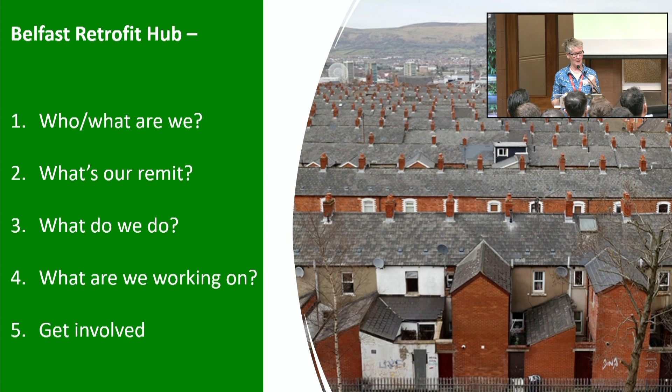Looking at who we are, I work for the council, and although we don't have housing stock, we've got considerable public sector stock, and we also represent the citizens of Belfast. So we have a real interest in making retrofit happen.

The hub itself, we set that up in September 2022, because we'd carried out a carbon analysis of Belfast and realised the built environment was such a major factor in all of this. So we convened the retrofit hub. We try to facilitate that, get everybody in the room, and my role is to nag, cajole, support, and try and get everybody to work together.

I suppose the most important thing is just to show the amount of collaboration. What we found is all the different sectors and organisations are all working on really interesting things, and if we can pull together what we know and what we found out, we can move ahead.

This is what pushed us towards focusing on the built environment, because the carbon footprint for Belfast showed us that domestic was coming in about 40%, and then commercial and public buildings were coming in about a quarter of the emissions in Belfast. In terms of homes, we're looking at about 156,000.

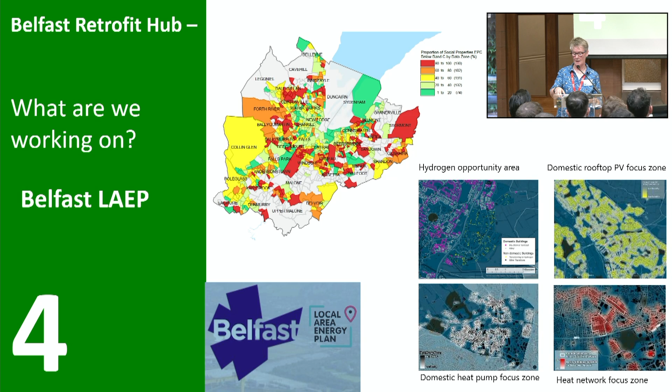Another one, you've got Alan Ritchie here today from C60 Architects. We'd identified that we were missing detail on this really tricky sector to retrofit.

So we commissioned them to carry out a detailed retrofit survey of two of the private sector's solid wall Victorian rental properties, because we need to understand what are the local challenges, what are the local prices, what are the local materials. The bottom line, and Alan can tell you a lot more about this, is that in some cases you look at buildings and no matter how much money you throw at them, you will really struggle to attain any kind of high level of EPC rating.

And the last bit, this is the bit that I'm knocking my pan in over at the minute - this is the really big piece we're working on. It's getting an area-based cross-tenure pilot project, because this is really common across Belfast. We have privately rented, social housing, owner-occupied sprinkled in amongst all the rest of it. So we are trying to find a way, because we know we've got major grant programmes likely to come in two years' time, but they won't solve everything. We've found that in GB and the Republic of Ireland.

We need to find a way, if you've got a street with maybe 20 houses in it, and some are social housing, some are eligible for the current funding pots - the ones that aren't eligible for funding, they're the ones that are blocking the whole thing from going through at the moment. So we're trying to find a way of bundling them. We're trying to sit down with our partners and work out there must be a solution to this, because even if and when those major funding pots come through, we're still going to have this problem to solve.

So we're also working with our partners. Housing Exec have got a very ambitious low carbon homes project, so they've got 400 deep retrofits going on, which are amazing - you might hear about those today. But also the Northern Ireland Federation of Housing Associations, they have an ambition to deliver a more shallow retrofit in 4,000 homes across Northern Ireland. Programmes like this can be the cornerstone to us being able to do a pilot project like this, and that's just a good example of how we collaborate.

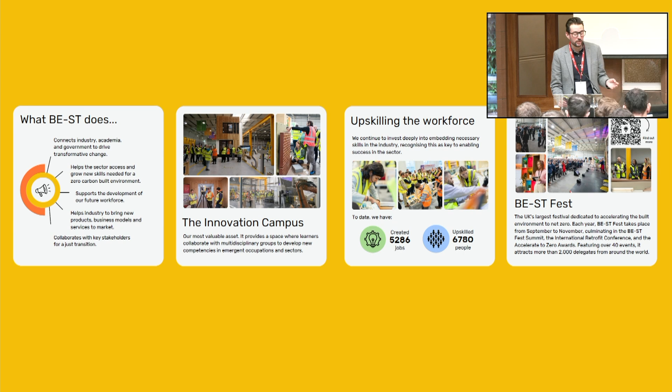We deal a lot with upskilling in terms of the workforce as well, so we train people in what would have been called green skills or clean heat skills. We do hands-on practical training. People get an opportunity to get hands-on, and we run a conference every year in November called BE-ST Fest, which is focused on 2 days - a general built environment net zero summit, followed by the International Retrofit Conference on the second day.

So we've heard about the domestic market, and we exist within BE-ST as an impact manager there working on retrofit. We do look at domestic properties when we talk about retrofit with a keen focus, but we're also acutely aware of the number of non-domestic buildings that are going to have to deal with very similar challenges on a completely different scale. But what we've found is that we see the similarities - questions around funding, knowledge gaps in the existing data sets, understanding what we want to do with building long-term asset management plans - all of that mirrors in non-domestic properties as it does within domestic properties.

So as part of the university, we applied to Scotland's Public Sector Heat Decarbonisation Fund, which was managed by Salix Finance on behalf of the Scottish Government, and we were awarded a grant of just under 1.25 million to retrofit our training lab or accelerator lab, where we do our physical training, to decarbonise the heat within that building.

As being the innovation centre, a core focus for ourselves wasn't just to demonstrate a living lab for retrofit, but also everything else that we did at BE-ST. So if we take a fairly difficult, complex concept like retrofit, and we make that more complicated further by trying to include modern methods of construction and off-site fabrication.

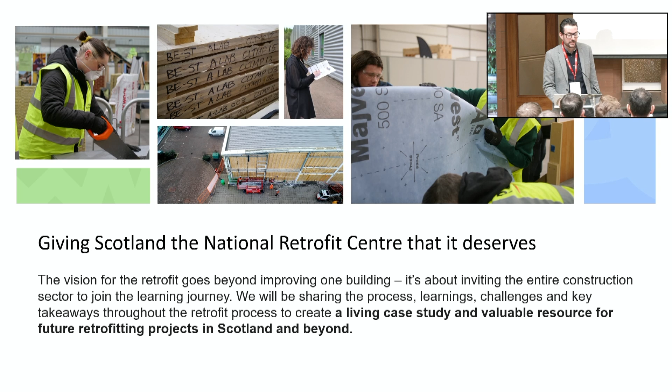In order to demonstrate that these principles in new build could be applied in retrofit settings, and to some degree or other help us accelerate the uptake of retrofit across the sector. What we want to do is have a demonstrator project that is a beacon that people can come to and learn from. It's potentially not going to be a replicable project, but what we wanted was to showcase as many products, services and approaches as we could that could be cherry-picked across the sector in terms of an approach.

Our key focuses are delivering the first phase of a multi-phase campus development. We saw this as being incredibly important because anyone who deals within asset management or estate management has to marry their long-term estate investment with retrofit. And how do you achieve incremental improvement without having abortive spend when you're doing works? So how do you ensure that you take it far enough to have a deliverable phase one project, but haven't taken it so far as to lock yourself out of future investment in the building?

Ultimately, we intend through this project to achieve the EnerPHit standard for the full building and the new net zero public sector building standard as well. We wanted to maximise our funding opportunity, because that's a lot of money to be able to bring in to the university, and it represented 80% of what we had applied for at the point of funding, which I'll maybe touch on later. And we wanted to be data-driven in everything that we did.

The core focus of the funding is around decarbonisation of heat, so that had to be kept true. But we promote a fabric-first approach, so we wanted to reduce overall demand. We also wanted to maximise other opportunities within our campus, using modern methods of construction and homegrown timber CLT manufacturing processes. From the outset, we decided to prioritise low-embodied, homegrown, natural-based materials as far as possible, and that gave us a benchmark to work from.

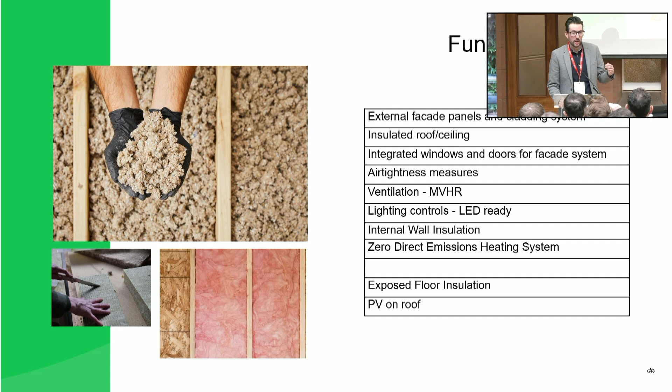So what we decided to do was move the exposed floor insulation to a second phase, and we've over-designed the walls and ceiling to account for the heat loss that generates, offsetting that to still achieve the energy reduction, whilst also having to design in an ability to move all of the doors on the external wall up by the 230mm we're going to have to work with.

So challenges and opportunities of a project of this magnitude—the biggest one being timescales. Government funding runs on a financial year basis. You're told on the 4th of April that you're successful in your funding application, and the funding has to be spent in its entirety before the 31st of March the following year. That included going from stage 1 design to stage 4, tender, procurement, on-site, off-site—not an easy task.

Again, trying to marry between scope—what do you include within a phase 1 retrofit, and what do you move to a future phase of development—and how do you ensure you're delivering across different project phases? How do you drive innovation within a project? How do you manage and mitigate risk? How do you ensure that the story is told?

So that's part of what I'm here to do today—to talk about this as what we refer to as warts and all, because we believe honesty is key. There's no point showing this at the end of the project with the chocolate box and saying it was very easy, a turnkey solution to deliver. And how do we create a platform at best for our partners to build from?

So this is how we've split it. Phase 1 is the current heat decarbonisation works. Phase 2 is further internal augmentation, extension, and final fabric envelope at the front end of the building. And overall, phase 3 is the future whole building being certified under the EnerPHit criteria.

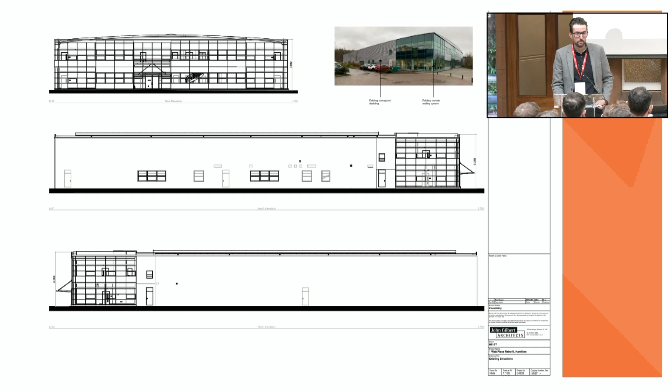This is a really boring slide, but that's really how boring the building looks, unfortunately. I don't have a better photo of it, but essentially what we're looking at top right is that curtain walling system, which is where the heated spaces are. That's coming down, and we're trying to turn this into an energy efficient box. Long term, this is what it should hopefully look like—these are the drawings submitted at planning status.

But this will not be the building that's delivered in phase 1, thanks to the value engineering. Things like your draught lobby and the canopy have moved into phase 2. Anything that sat outside the thermal envelope was moved into phase 2 to reduce costs.

The design itself is a panelised CLT system with JJI joists externally to give you the depth in order to install homegrown Scottish hemp natural-based insulation material. It will be a clad system in two different types of Thermowood from Russwood cladding, triple glazed windows, and the ceiling is a suspended timber ceiling detail, as opposed to a new roof, to get the thermal envelope there.

As part of the project, we looked at the existing building and measured its current performance as best we could. Within tight time constraints, it would have been nice to have a full heating season with which to install sensor technology, but we did what we could.

We did an air tightness test on the building and a smoke test, and stopped counting at 27 air rate changes and just decided to agree that it was pretty leaky. Anything that we would do would ultimately be to our betterment.

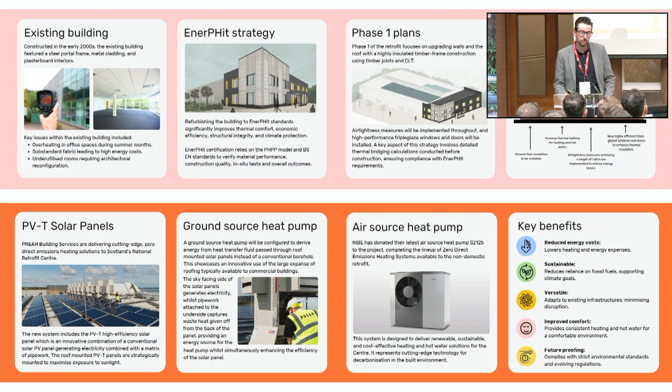In order to deliver this, we've used and utilised our extensive network and those companies that we want to support, but who also want to support us and help us deliver that. We're featuring Kenoteq K-Briq, a 90% recycled brick, a product that we have featured in our factory for a long time, and a company we've supported, but now they've only just achieved their BBA compliance, and this will be in a real build scenario as well that will build the plinth design.

We've got the Russwood Cladding System, a Scottish-based company, Ecological Building Systems, who support the sector in terms of training around passive house and air tightness products, Rockwool Insulation have supported the project, as well as Indie Nature, based in Jedburgh, who provide hemp natural-based insulation.

Ecosystems Technologies, who manufacture Scottish low-quality grade timber, homegrown CLT, into a commercially viable structural Scottish timber system. So if you're using CLT in the UK and it doesn't come out of our factory, it's not coming out of the UK stock.

So this is one of those opportunities where we're trying to see how do we scale this up and really make it deliverable, and how can we take it, not only demonstrate from a new build perspective, but within retrofit.

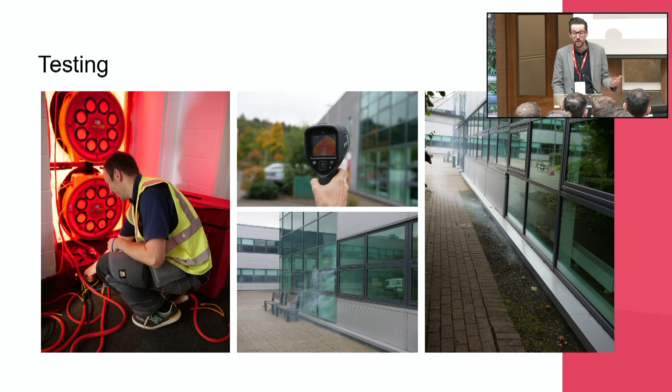We've retained all of that. We're very fortunate for space, so we've dismantled the facade system as carefully as we can, and we're looking at options for how we can reuse or move on these materials to be used in further, either a phase 2-3 construction on our site, or onto another site as well, to minimise wastage.

We have taken the opportunity to upskill. A big part of what BEST does is train people on how to build to passive house standard. This is the design team, as well as the main contractor and the main contractor's supply chain, undertaking that training together on site to understand the core principles of what we're trying to achieve in terms of the thermal envelope, continuous air tightness line, and tight fit of insulation. On site as well, the architects visited the factory floor to talk through the challenges of fitting the material and ensuring minimal gaps and no overlapping joints, in terms of toolbox talks and upskilling the supply chain to deliver other projects of this scale.

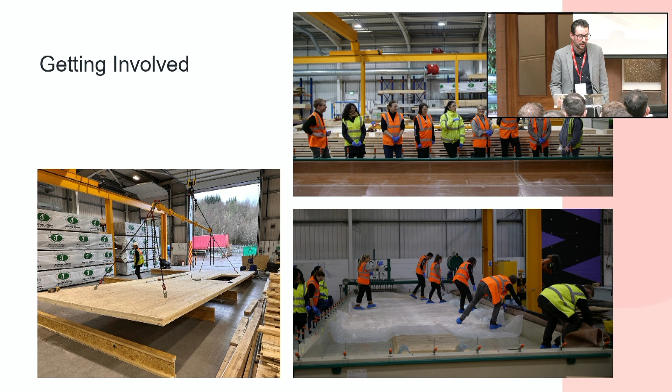As I said, we're very fortunate, and some of the panels we've been able to get hands-on and actually manufacture ourselves, and Ecosystems are very patient with us when we do that. We haven't been able to at this point, but we've just purchased a new CNC machine that's now large enough to process an entire panel. So these panels have been planed, filled and cut by hand. Next month, once our CNC goes on, the panel should be able, in theory, be lifted off the bed and run through, and all four edges cut and all the apertures removed.

So this is where we are just now. In terms of the demolition and dismantling, we're slightly further on, and we're ready with our first two stages of panels built, waiting for the wind to calm down so that we can lift them into position. I had hoped today to be able to show some videos of that, but last week didn't happen, so you're stuck with these rather boring photos and me talking over it.

But this is to give you a sense of scale of the panels. The panels range from 8 metres to 10 metres tall. The depth is defined by the amount of insulation that we required, and obviously we wanted a tight pack and a tight fit.

The more eagle-eyed among you will be able to see that some of these photos are not as it will be when the door is closed. We have had a lot of work to do in terms of the upskilling and understanding how to work with the material, the time it takes to cut it, the time it takes to fit it. And I don't think it's ever any fitter's dream job to have the client sitting up the stairs and be able to walk down at any time and point things out. But it does give us that higher degree of quality assurance.

Yeah, and that's us. Thank you very much.

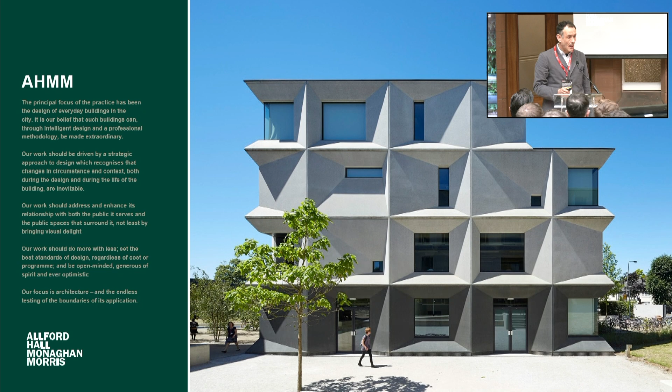AHMM, so Allford Hall, Monaghan Morris, we're a general architectural practice. We work across all sectors, all building types. We're London-based, but we have offices in Bristol, Oklahoma, Madrid, and a small office in Sydney now. We work across all sectors, as I say, new build and retrofit.

My role within AHMM is we have an in-house building performance team. We work as a kind of in-house consultancy, interrogating architectural decisions, carrying out analysis across all kinds of environmental metrics to try and understand and improve the impact of the decisions we're making as architects.

So what I'm going to talk about today is a tool we developed through a KTP program with UCL, which visualizes whole-life carbon, and we use to interrogate decisions and understand the kind of life cycle impacts of those decisions.

But I want to start with just highlighting retrofit. I've been at AHMM for 11 years, but as a practice, we have thought about reuse and what we now term retrofit of buildings as a pragmatic starting point for any building. This is the Tea building on Shoreditch High Street in East London. You can see the series of dates on there. We first worked on this in 2003. The competition for this building was to demolish it and propose a new build on that site. We recognised the kind of qualities that are in the space. It's the tea building because it's the old Lipton tea warehouse, beautiful high ceilings, great bones, good daylight. So we recognised the value in that building and proposed keeping it.

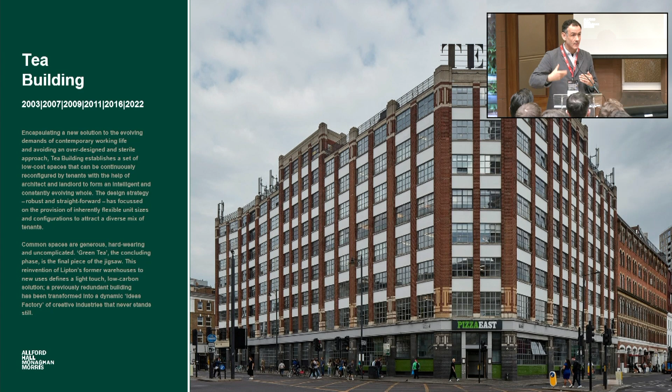The series of dates on that show that we've been back to carry out further retrofits. The 2009 project was called Green Tea, which we went and retrofitted and upgraded the fabric, replaced the windows. In 2011, we went back and upgraded the environmental systems in there. But it's recognising the historic pattern of those buildings and the architectural qualities there, which is why we were thinking about retrofits.

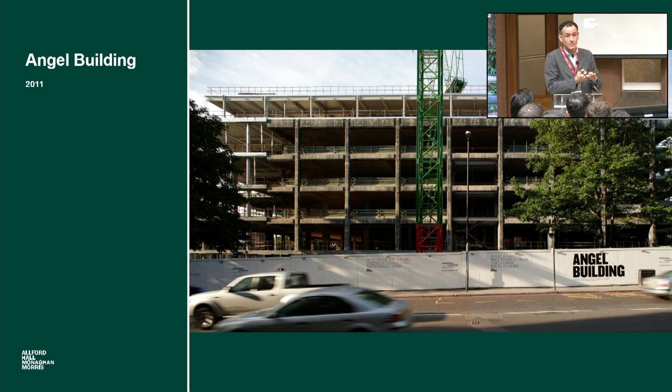The Angel building in 2011, again, is another retrofit. It's a quite slick office building, city fringe near Angel in London. But again, this was an existing building. It was an unloved telephone exchange. We recognised early on in that process that the existing frame had good floor-to-ceiling height, good bones again. We could retrofit that. Carbon wasn't on the agenda at the time, so it was about cost and time. We saved the client £7 million in 9 months on programme by reusing that frame. So it was an intuitive way of thinking about that building.

We turned the unloved courtyard into this new public room on the right-hand side with what was at the time the greenest concrete. We did a report, 35% PFA in 2009 was quite progressive, we thought.

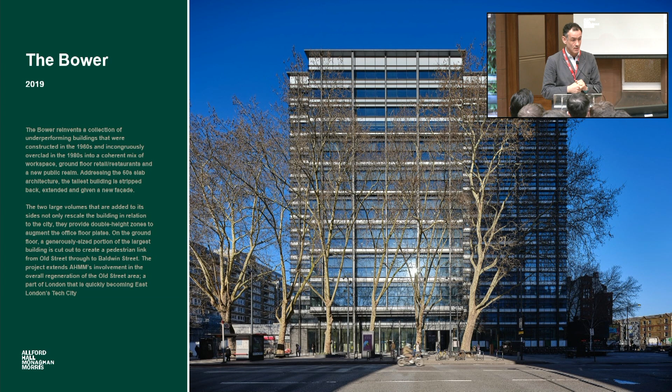Moving to more recent buildings, this is 2019, the Bower, on Old Street just along from our office. This is a 1960s tower which was reclad in the 1980s, and then we have similarly reclad it in the 2010s. It is a retrofit. You can see we added 3 floors onto the top of the building. We added some wings onto either side of the building. The existing concrete frame, again, good bones, but had pretty limited floor-to-ceiling height.

Final one is one we finished last year, Tower Hamlets Town Hall. This is a listed building, so in this case we're working closely with heritage bodies so that they can understand what we're trying to achieve. We can work within their parameters and constraints, and we can upgrade fabric sensitively to the building.

But what we also like to investigate from an architectural point of view is taking these historic buildings, in this case a listed historic building, and putting these kind of modern interventions next to there, so we create these moments of contrast and we think of architectural delight around that. So a kind of history of AHMM's approach to retrofit as an intuitive, pragmatic approach to how we think about architecture and recognise the qualities that are in those spaces.

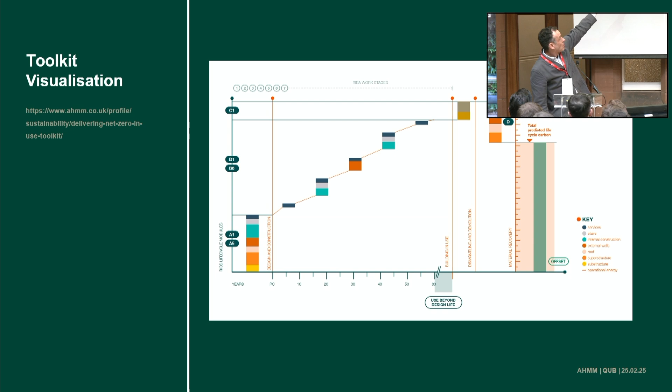The C module at the top is the dismantling and demolition of the building, the carbon associated with that. And then where we go beyond RICS into the D, along here is a negative number, which is the carbon you can save by recovering materials from this building. So in this chart, you get a whole life carbon number, which then defines what you need to offset. And what we're trying to do with this is to provoke the lowest possible life cycle carbon and get designers thinking about what happens during the life of the building and at the notional end of a building. So setting up for retrofit, essentially, so we have to offset minimally.

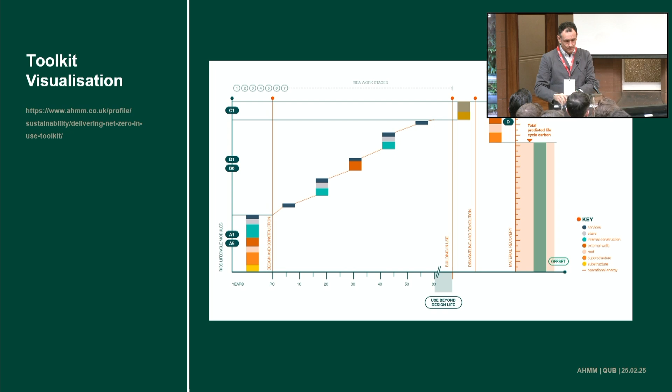So I'm going to use that chart to talk about a couple of other projects as we go. The toolkit interface, as I say, is an Excel spreadsheet. Our graphic designer has done stuff with Excel that I didn't know was possible, and it's beautiful. There's buttons, it kind of opens up and unfolds in front of you. You can download it, it's freely available, and there are some tutorial videos on our website, so you can download this, use it, and start using it. It works on quantities and carbon factors for materials.

So I wanted to talk about two projects and then a bit of research. Excuse me.

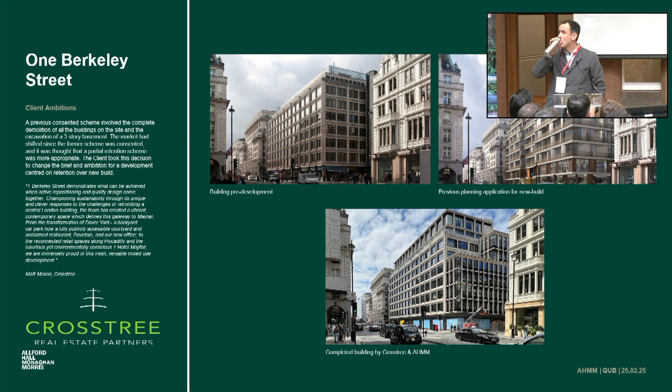First project is 1 Berkeley Street. This is West London, on Piccadilly. The building on the left, just poking into the corner, is the Ritz Hotel. So this is a historical space in a heritage context.

Our client came to us around 2020 with a different business plan, who thought they could reuse the existing building. The bottom image is what we have done to that building. We've extended it upwards and outwards and retained the existing building to create an office and hotel.

The fact that this is in Piccadilly is important because it is retrofit in a high-value location. So we're talking about retrofit in a space where you might expect things to be new and shiny, whereas actually the market is accepting reused and recycled buildings.

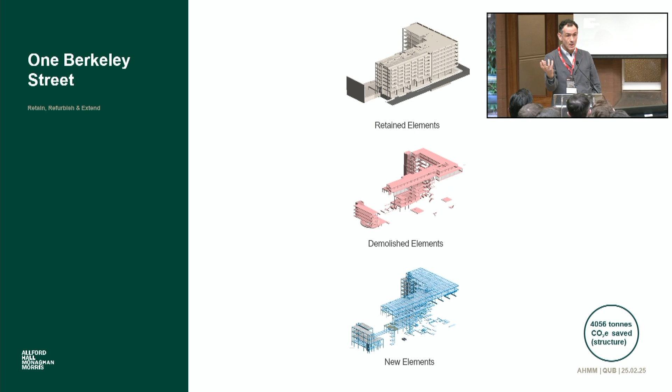So this is just some call-outs from our Revit model. We've got some retained elements. We did demolish quite a lot, and we did build quite a lot, but we reckon we saved about 4,000 tonnes of carbon just by keeping the frame there, keeping the superstructure, and not digging any holes in the ground.

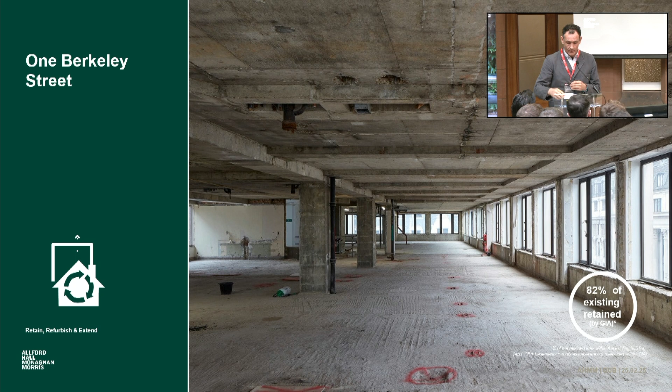So the building itself has got good bones again, so it's a concrete frame, it's got good floor-to-ceiling height. We've saved about 82% of the building by GIA. As I say, we've replaced the windows, we've upgraded the thermal performance of the fabric. On Berkeley Street itself, the facade is simply painted, the bricks are simply painted.

We introduced these strips of greenery up the facade to create some biodiversity net gain, and our client had an aspiration to have some kind of explicit environmental qualities around this building. The courtyard, again, is kind of lushly greened.

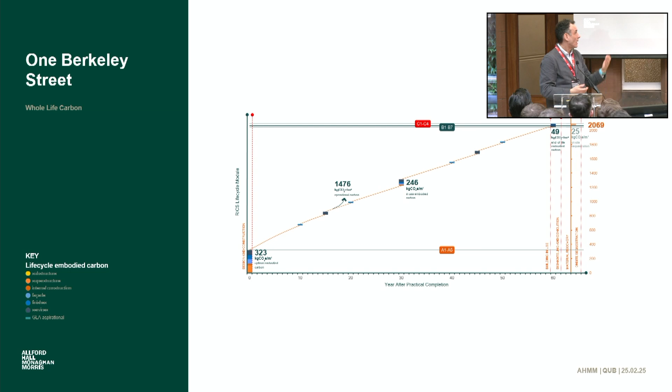So an obvious way to decarbonise the life of this building would be to electrify the building. The refurbishment and replacement rate chunks in this are RICS assumptions, because in this case we couldn't predict the future - we don't know what our client is going to do with this. I've got some slides later to talk about the limitations of that.

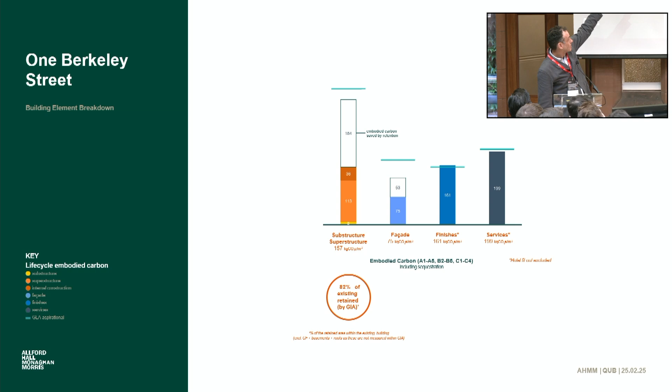So you can see that upfront carbon is saved in the substructure, superstructure and the facade because we kept most of it. The stuff that we are not doing better than targets on is finishes and services, because that's all in the life of the building. So we need to think better about how we work the life of the building.

A note on circular economy: we used a load of reused raised access floor. I'm highlighting this because it was a total nightmare. Every time I went to site, I got shouted at and sworn at by the project manager because he's finding this stuff at the right time, in the right quantum, getting onto this site. Total nightmare. So I think circular economy is something we need to work on as an industry.

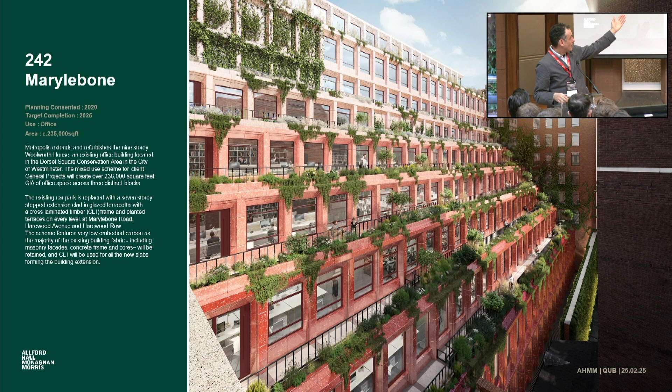Second project, 242 Marylebone. This is a slightly different project - another reuse, but with a significant portion of extension. We built a load of terraces with some greenery on it, with outdoor space and amenity. It is again in City of Westminster.

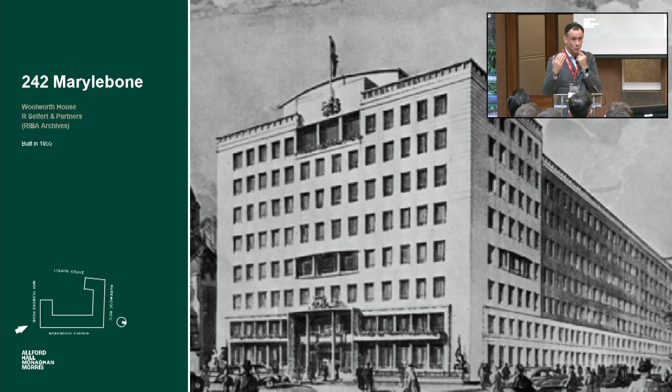In fact, our client had a quite multifaceted brief for us about the user experience and work-life balance, in terms of amenity, how they integrate active travel, running, etc. into the building. So they were interested in the user experience and the architectural experience of this building.

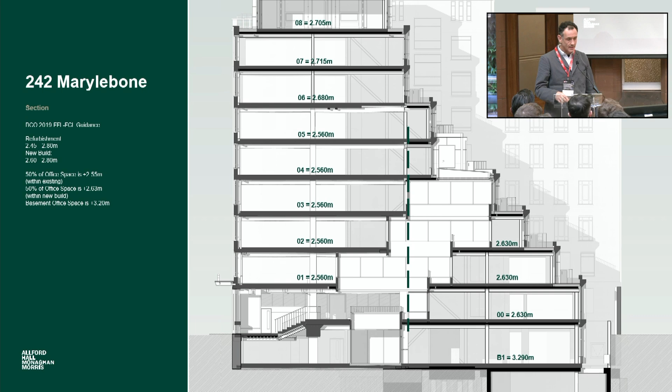Again, our load-bearing brick building with lots of little cellular spaces in the middle—we took out a lot of that space and replaced it with columns. We saved, I think, 95% of the existing GIA.

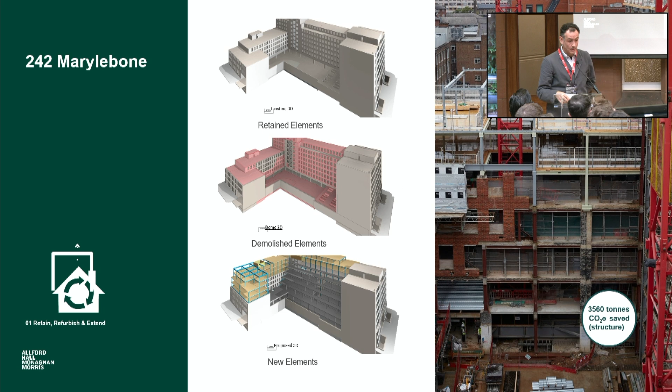Again, we had to strip out quite a lot of the building, particularly on that back elevation. We had to take the facade off so we could rebuild that extension. We think we saved about 3,500 tonnes of carbon by keeping the structure. We wanted to keep the bricks.

More on that later, but the structure looks like this. So we've got the existing building in grey, we've got a new steel and CLT structure on the side and on the top.

Driven by the carbon, a steel and CLT superstructure was not that much lower than a steel and metal deck and concrete structure, but where the savings were was in the substructure, because the steel and CLT was a bit lighter, so we saved a lot in substructure. But we have dug a new basement in this case, so we're kind of adding to our carbon footprint in doing that.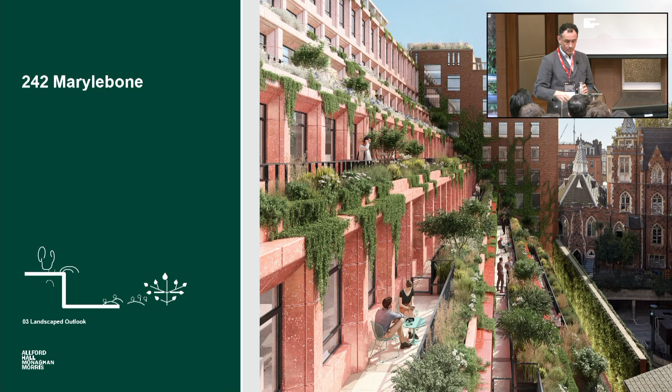The terrace looks like this. Every floor plate gets an external space, with soon-to-be lush green terracing around there, which delivers our biodiversity net gain, but also gives people access to some biophilia and hopefully some place of respite, as per our client's aspiration.

And we also upgrade the entranceways. The green element within this terrazzo was a crushed part of the existing structure that we thought we could build into that and have some visible nods to the reuse of the building.

We cut an atrium through the building to get some daylight into those newly created deep plan floor plates, but also to give you a view out and some drama to the entranceway, because the existing entranceway didn't have any of that. And then the new floor plates—as I said, we were looking to have clean, high floor-to-ceilings as much as we could within the constraints of the existing building, and marrying through to the existing floor plates.

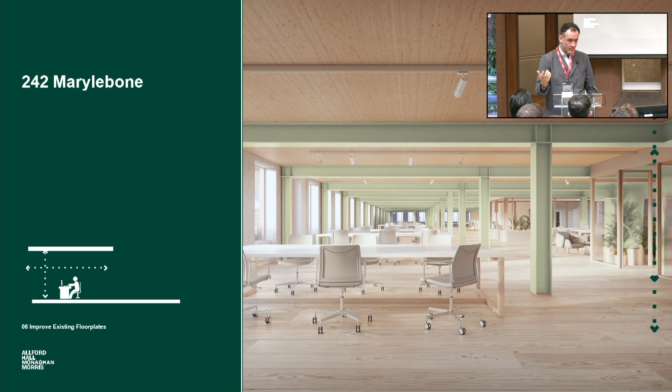Our client was interested in the architectural experience of being in these spaces. So what the CLT and steel gives us is a really clean soffit—all the air is delivered through the floor. We have minimal servicing on top of that, so there's less stuff to rip out throughout the life of the building, and we get this nice clean floor plate.

Numbers. So same charts as the previous project. On the left-hand side, we've got upfront carbon, A1 to A5, again compared to the GLA target and aspirational target in the UK net zero building standard.

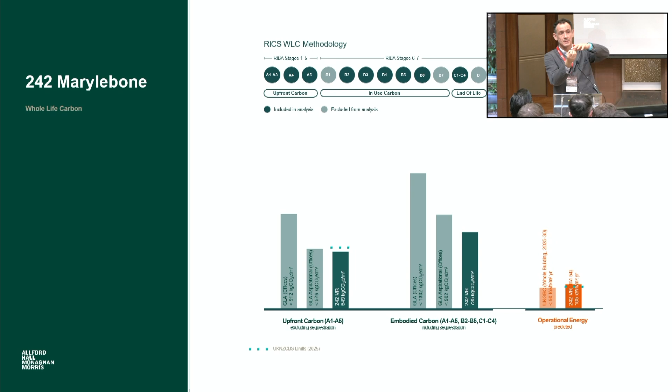So you can see we are about at the GLA aspirational target in this case, and that's because we've dug a basement, we've built a new structure, we've built a new building alongside the existing one. But because we've kept so much of the existing building, the carbon intensity of that is diluted across the GIA of the whole building, and it gets us just underneath the net zero carbon building standard.

Similarly, for whole life carbon, we duck just under the GLA's aspirational number, at 735—sorry, the resolution's bad, my eyes are even worse—so yeah, 735 kilograms CO2 per metre squared.

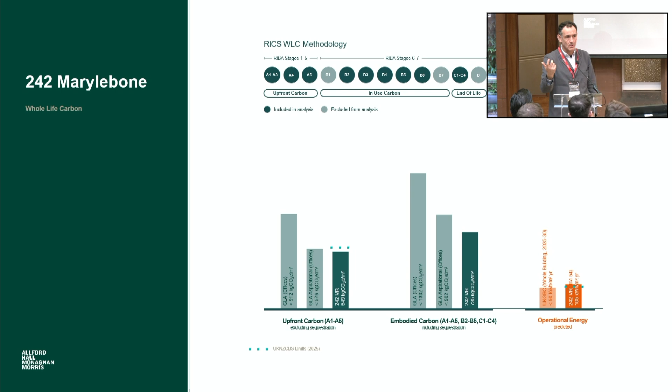And then operational energy, we're around about net zero carbon building standard as modelled. So we need to go into this building—it's due to complete next month—so we will get into the building, do some post-occupancy evaluation, see how much energy is actually used. But as modelled through a TM54 process, we think we're around about the right place.

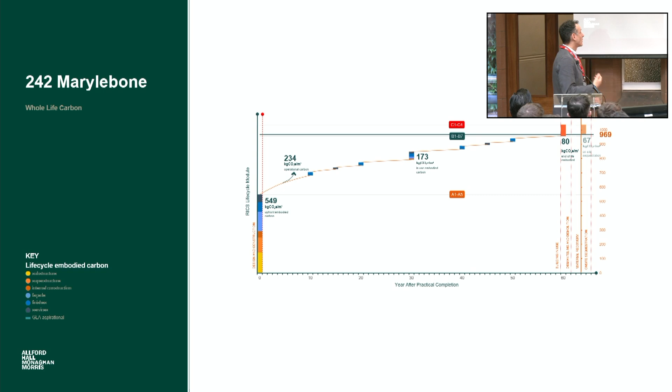Our life cycle carbon chart in this case looks like this. You will note we have got a much bigger lump of upfront carbon with a load of yellow this time, because we've got a basement dug, we've got some substructure in there, we've got superstructure, and we've got a load of facade this time because we've had to rebuild that facade. We've created a load of new facade in that terraced building.

Operational energy—it's an all-electric building, so it is relatively flat. There is a slight curve in that because our model takes into account the planned decarbonisation of the grid, so that is why there's a curve there. And then again, the reuse elements are as per the RICS methodology, so we're making assumptions based on how this building is going to be retrofitted and reused over its life to inform how we decide, but we don't actually know that.

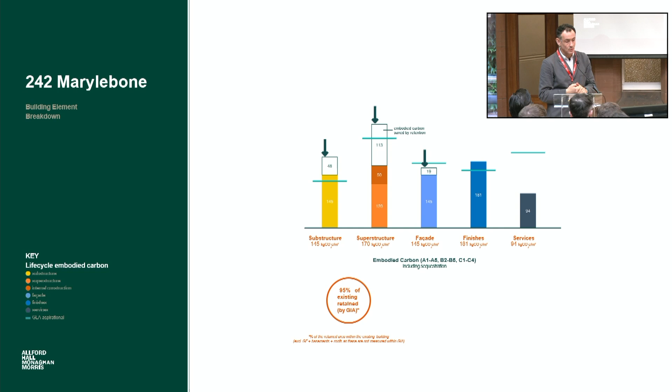Other numbers: substructure on the left, superstructure in the middle. Again, the coloured pieces are what we've spent in terms of carbon, and the white bits are what we think we've saved by keeping the existing building. So we think we've saved a lot in the substructure and superstructure, a bit in the facade, but for finishes and services over the life of the building we're not sure, and we don't know what we've saved, if anything.

A load-bearing brick building, we were taking a load of bricks out of this building, we were creating a load of new facades. We wanted to reuse the existing bricks, divert them from landfill on site, reuse them.

The raised access flooring in the previous project highlighted the difficulties with supply chain and timings. This project highlights the difficulties of insurance policies. We couldn't get anybody to insure reused bricks on site, so we've had to give them away to somewhere else. They're sitting in some reclamation yard for somebody's house extension rather than being able to use them on site. And we had to go and buy some new bricks to match the ones that we had on site and were throwing away. So something for us to work on is how we ensure reclaimed materials can be used.

The final thing I wanted to talk about was a piece of speculative research we did called Fit Out, Rip Out. This is about fit-outs in commercial offices. It's relevant to retrofit because it's about how we set up our buildings for retrofit.

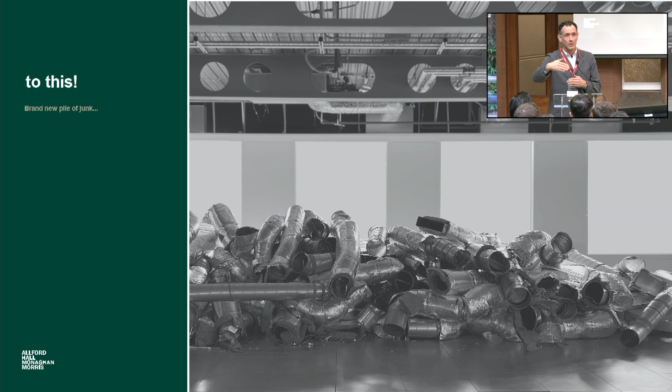So what we wanted to do was understand what is happening in the use of our buildings, commercial offices in this case. How often is this sort of thing happening? Is that reflected in the RICS methodology, and what were the carbon implications of this, and therefore how can we use our visualization to help drive architectural solutions to minimize life cycle carbon?

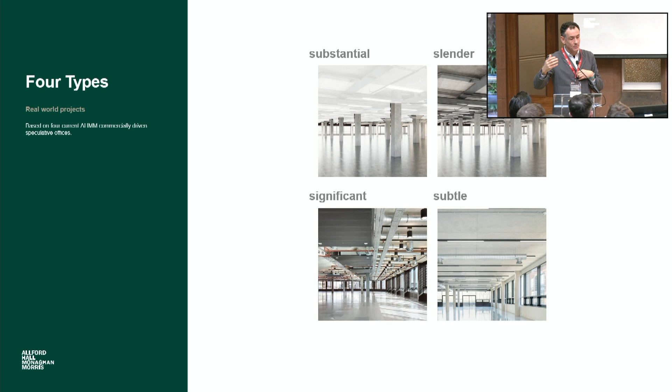Slender, which is lighting and air delivery above, and then the subtle, which is our office in Bristol actually, which is cooling embedded in the slab, air delivered from above, minimal finishes, minimal fit-out, less stuff to chuck away. We codified these things to understand what elements of those Cat A fit-outs are baked into the building.

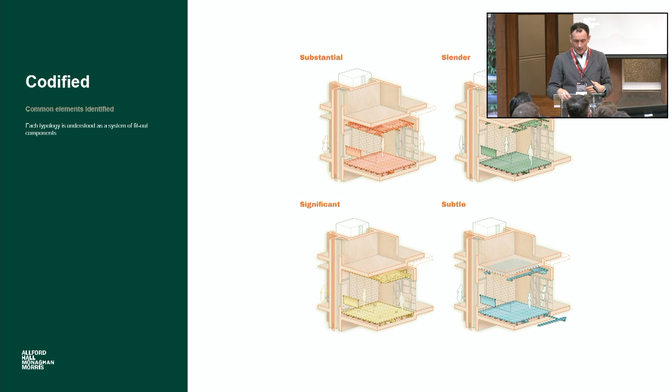So, for example, in the subtle version, the cooling coils are in the structure of the slab. You can't take them out. They're baked into the building. Whereas in the substantial version, it's all hanging from the ceiling - you can rip it all out and chuck it away if you wish. And that's what we see happening time and time again in our projects.

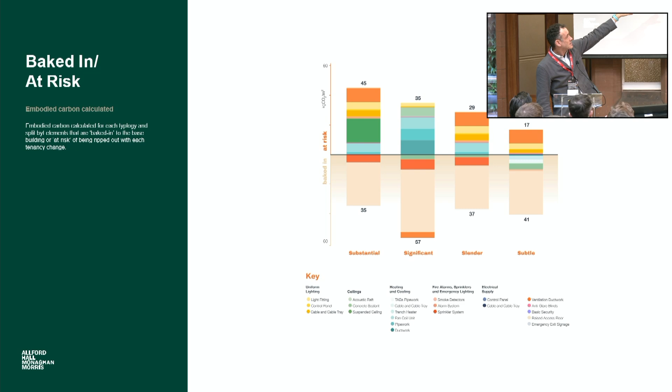We then accounted for the carbon in each of those Cat A fit-out versions and classified it by what's at risk. Above the line is what's at risk, i.e. what can be ripped out of the building, and below the line is what is baked in. So in the substantial version, of the 80 kilograms of CO2 per metre squared just in fit-out, we reckon about 45 kilograms per metre squared is at risk of being ripped out every tenancy turnover. Whereas in the subtle version, of the 58 kilograms per metre squared that exists, we think only 17 are at risk of being ripped out every tenancy cycle.

We then used our life cycle carbon tool to analyse what actually happens in typical commercial offices in London - a particular segment of London, a particular size of offices - which said that the average tenancy is 5.1 years, and on average, every third one of those tenancies is rolled over.

If we look at the subtle version of that, which is when we bake in as much as we can into that fit out, we can see that the same tenancy rhythms, the same patterns of use end up with much less being ripped out at the changeover of a fit-out cycle, so much less carbon over the life cycle of the building, but still nearly double what RICS is assuming.

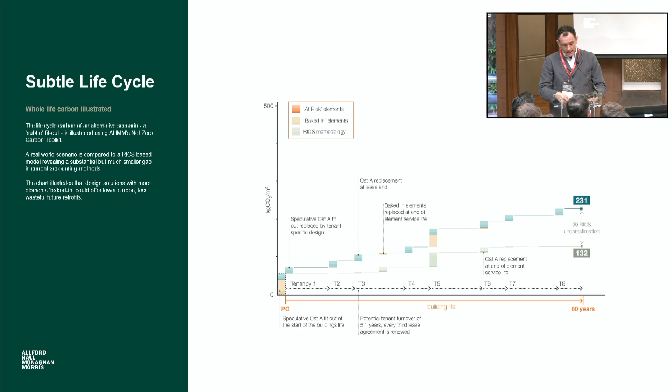So what we're trying to do as designers up front in new builds and in how we retrofit buildings is facilitate future retrofit in a low carbon, low resource way.

So what's next? I think we can challenge the market perception around retrofit of buildings. I've shown you a building in a kind of high-value bit of London, which maybe wouldn't traditionally go for a recycled building, so I think the market is shifting.

I think we've got a lot of work to do in circular economy, so in supply chain and timing and storage of stuff and accessing things and how we ensure materials for reuse, we need to get on top of. I've talked about carbon and decision making and how we're using this carbon visualization to inform and articulate decisions, but of course it's not the only thing.

Lots of other aspects are coming into our decision making about architectural quality and the kind of character of those spaces. So carbon is one parameter of many.

I'm sorry, I can't read this. I forgot what it says.

I suppose the other caveat is retrofit is not always possible. I think we need to keep that on the table. The retrofit is not always a possible option. We have some sites where we are knocking down buildings, and it's because the existing building is not of good enough quality to keep. So retrofit, while it is the aspiration, it's not always absolutely possible.

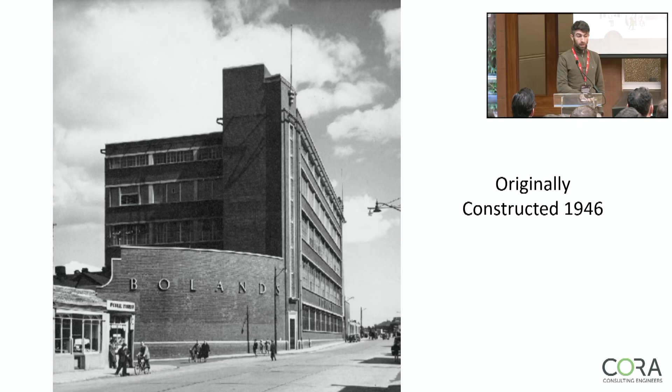Okay, so the Google Treasury Building was initially built in the 1940s, and it was called Boland's Bakery. It was initially a bread factory. We were lucky, we got to see a few photos of how it was constructed. Really useful when we're looking back and trying to renovate the building as to how it was built, what materials were used and how they were used.

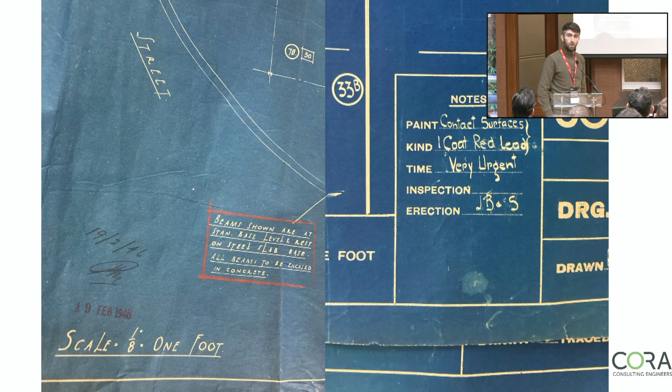On top of that, we also received, we were really lucky to obtain these - the working blueprints for the construction drawings here. Didn't realise until recently, but it was actually a Belfast architect that was involved in the 1940s, based down near Castlecourt there. Things were done really differently back then. You'll see on the left-hand side, that is the signature from the contractor confirming receipt of the drawings. Not something that's done today, but on the right-hand side, yeah, some things never change - looking at the time, being very urgent.

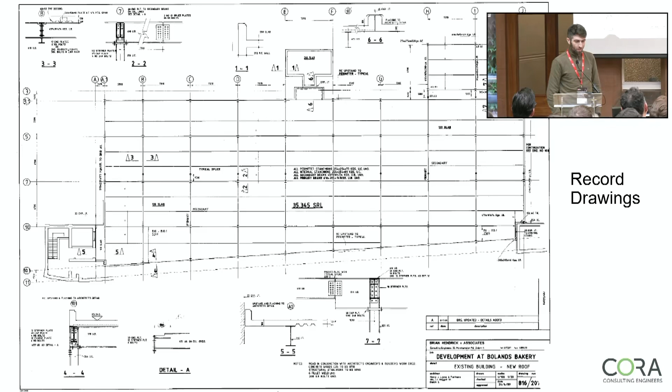Building remained unchanged then for another nearly 40 years, up until our project began in 2022. Received a bit of media attention back a few years ago for being the home of NAMA - probably unwanted media attention, but media attention nonetheless. AHMM are a familiar face today, with Craig speaking earlier - thanks to Craig for not stealing our thunder with this building earlier on. But yeah, proposed project was a 2-storey vertical extension and horizontal extension as well, getting rid of that atrium out the front. You're going to see a bit of crossover between some of the AHMM principles that they've used previously - raised access floor tiles, brick reuse, stuff like that.

Okay, history of the project done. So in now to more embodied carbon design. Just worth noting throughout this, we've been talking about embodied carbon for a long time now. But this presentation is nearly all photos, similar to Craig and Gavin earlier. We know what we have to do, we know what we can do, but this presentation shows what we're currently doing and what we have done. So this project currently on site, due to finish over the next few months, I think, hopefully by June.

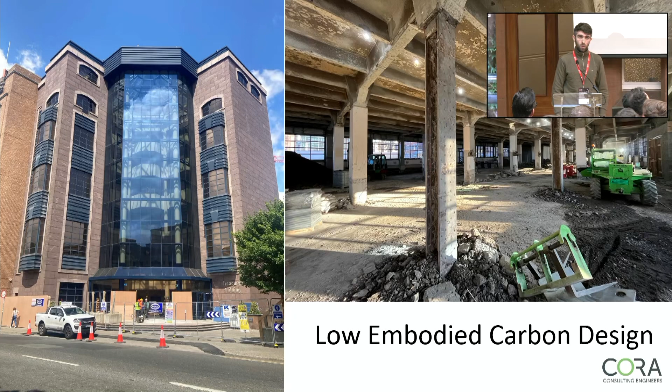Before that, just emphasising why we're even bothering to do this. Overall, a building's footprint is roughly about 50% cradle to gate, so on materials that go into the building of that structure. If we can improve our building methods and material use, it's not a drop in the ocean. We'll make significant improvements in the overall embodied carbon, the overall carbon footprint of the building.

Before getting into the design or what materials we're going to use, we wanted to interrogate the brief with the client and the architect. If you're designing a building, especially in Dublin or London, you design for 4+1 allowable live loading. You don't question it, that's just what's done, it's what everybody does. This is well in excess of the Eurocode, where in the south it's 3, I think here it's 2.5 plus 1. All we were asking was, please reduce the allowable live loading on the building. We're not asking for anything in excess of Eurocode, just let us design to Eurocode really.

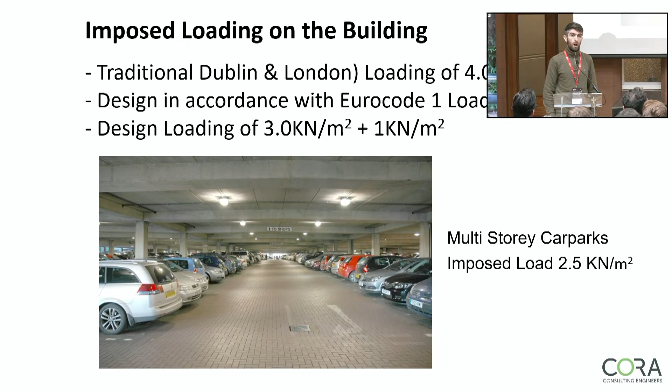We took the opportunity here, the client is Google. There's a high likelihood this won't be the last building they build in Dublin. We're hoping they'll carry this on throughout future projects. So it might be a small difference here, but if this maps out across any future buildings they do, it'll be a big improvement. Also, there's reluctancy out there to be the first client to do this, hesitancy like, will our tenants accept a building that's not 4+1? Our hope is that they'll look and go, if it's good enough for Google, it'll probably be good enough for us too. One of the big selling points we used to convince Google of this was, down below is a multi-storey car park designed for 2.5 plus 1. I think your office is going to be okay.

Onto some material reuse. Quite early into the project, I think this was being set up, so taking the opportunity here to let you all know about this platform. The Irish Green Building Council have a platform out there called CMEX. For all intents and purposes, it's a virtual or online salvage yard. If you have large or any quantities of construction material that you can't use in your own building, please put it onto this platform. It's all free, in the hope that somebody else might want it and take it off your hands, once again stopping stuff from going to landfill.

On this project, there was 500 metres squared of granite on the facade of that 1980s extension. Rumour has it, handpicked by Johnny Ronan himself in Italy, brought back. This is 40 mil thick granite. We took the opportunity here to put this on the CMEX platform. This was all carefully taken down and stored across 55 pallets, 500 metres squared, so a significant amount. Just over the last few weeks, we received word that 100% of this has been reused across a lot of projects around the country, in small and big quantities. You don't have to take the whole thing, just take some of it. So 100% of that didn't go to landfill.

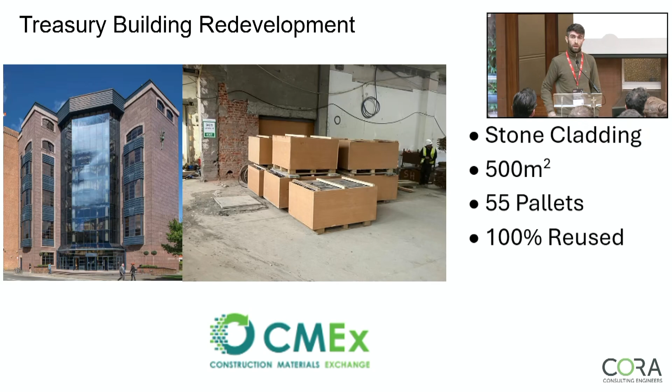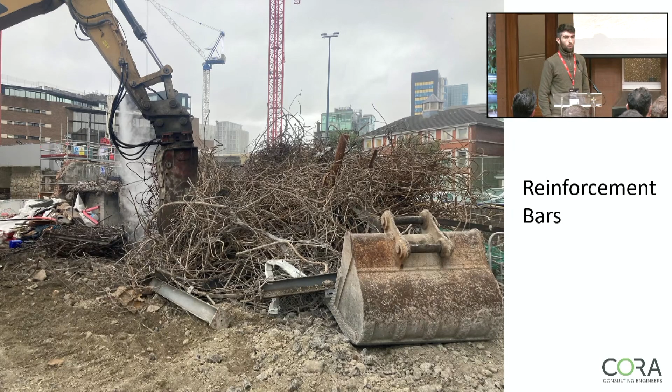Similar to Craig's previous project, we reused the bricks. We didn't have the same insurance issues that Craig encountered previously. Now, this is quite a labour-intensive effort to save materials, but once again, it stops stuff from going to landfill, trying to salvage as much as we can, clean it, and store it on site to be used back in the building. I'll speak later about most of the concrete, but some of it we couldn't cut out, it had to be broken out. In that case, all our reinforcement was recycled.

Another one that came from Craig's AHMM presentation was the raised access floor tiles. Now, we did not have the same pushback that he had. Horizontal elements in buildings contain most of the carbon, so if we can make a saving on the horizontal elements, we make huge savings here. By saving the raised access floor tiles on this job, approximately 5% of the building's carbon was saved. Everybody's delighted here, except for the raised access floor supplier.

We don't have exact figures on cost here, but I think there's a misconception that low embodied carbon design is going to cost everybody money. We've done this previously in another job in Dublin where the client saved €1 million just by saving the raised access floor tiles. Nobody on the design team had any issue with doing this. The contractor actually asked us if he could clean them in place before lifting, storing, and taking them back in. I think we're all guilty of working on jobs where raised access floor tiles have been scrapped, and then a few months later, lorries of it come back into the building. This is it, just stored on site. It's very important that this stuff doesn't leave site, because that causes further implications.

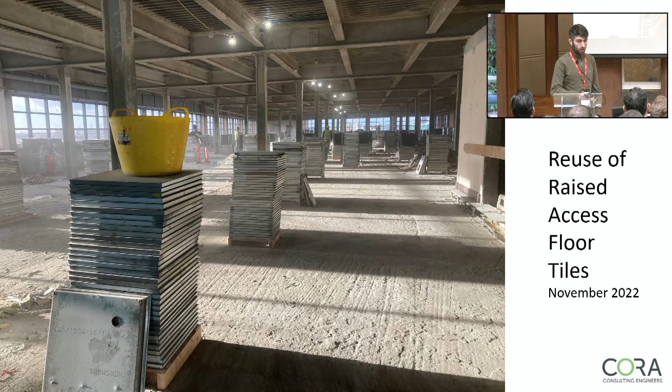The bulk of the concrete, what we could cut out, was cut out in sections, lifted onto lorries and taken off-site. We're extremely limited in the south as to what we can do with recycled aggregates. One of the only methods available was to put it through a company called Greenstone. We took it off on lorries to Greenstone, they crushed it, and they're certified for using it in some very limited civil engineering applications. But once again, we stopped this concrete going to landfill, because the vast majority of recycled concrete that comes off site in the south goes straight to landfill. So this was a big saving.

Getting on to some of the new structure then. Like we said before, horizontal elements are your big savers in terms of carbon. We used the lightest weight floor we could in the form of metal deck.

To try to reduce as much carbon as possible in that concrete, we went to 70% cement replacement in the form of GGBS. Anticipating pushback on this, because the more GGBS you use, the slower your curing times typically, there would be pushback in terms of programme.

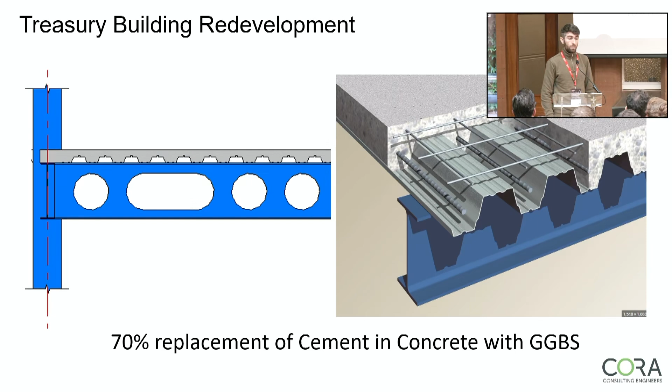To try and avoid that pushback, this was put into the specifications and tender documents from day one, so every contractor tendering for the job knew this was the case. The successful contractors, and definitely the ones who performed best in the tender process and interviews, were the guys that had no problem with doing this. Some of the unsuccessful ones actually suggested as a saving to try and reduce this to zero, which just wasn't an option in this case.

A few years ago, we started to get interested in where our steel is coming from, not really aware of the actual differences. I think John is going to present the differences as to where your steel comes from in terms of embodied carbon and the savings that can be made there, more just by questioning fabricators - where are you guys getting your steel?

In our specifications on this job, we specified that it needs to come from these plants, so that it can't be written out again, just to ensure that we're definitely getting the scrap content that we want.

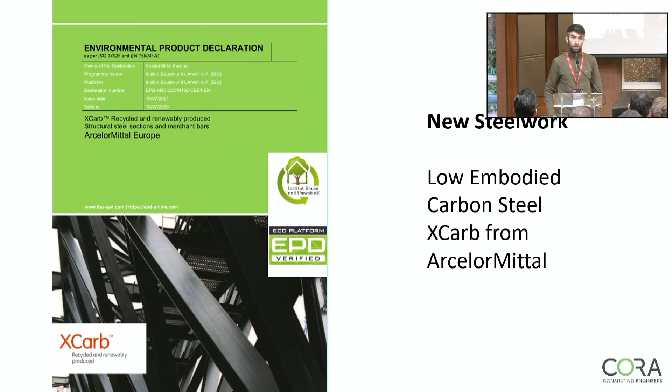Coincidentally, one of the fabricators during the tendering process produced this EPD document from ArcelorMittal, who were obviously getting similar queries to what we had, and actually put a trade name on the steel coming from both of those plants and called it XCarb steel. So the exact same steel, just with a trade name now and an EPD to follow. So rather than having to write the specific plant into your specifications from now on, we can just specify XCarb steel. I'll leave you with this.

This is a drone shot showing our XCarb steel, the 2-story vertical extension, and all our metal deck ready to be rolled out. Thank you.

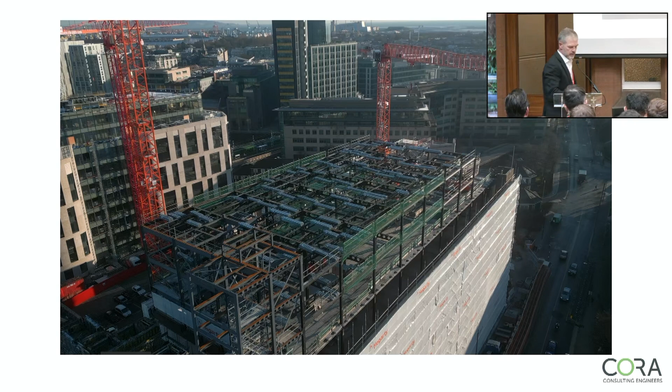So I'm just going to continue on the presentation here and talk in a bit more detail, a few more facts and figures. The big thing we were trying to do on the project to create low embodied carbon impact was something we came across in 2019, an idea about trying to reuse structural steelwork in buildings.

So when this building came along, we had previously found this particular Steel Construction Institute publication, P427, which was about the reuse of structural steelwork.

And we went about trying to use that on this Treasury building reuse. So a quick summary of what it's about.

This document was written to be used for steelwork of unknown provenance, which was effectively steelwork that people had in stockyards that, when CE marking came in, didn't have CE marking and they couldn't do anything with it. It was written by a technical committee from the SCI, and it's a really well-written, practical document. It contains things like you only use post-1970 steel, because before that, material factors of safety weren't as evident or consistent.

No bridge steelwork or anything that had been subject to fatigue. It was also intended for steel to be salvaged and possibly stored and reused at a later date on another site. Now, this was the big thing associated with it.

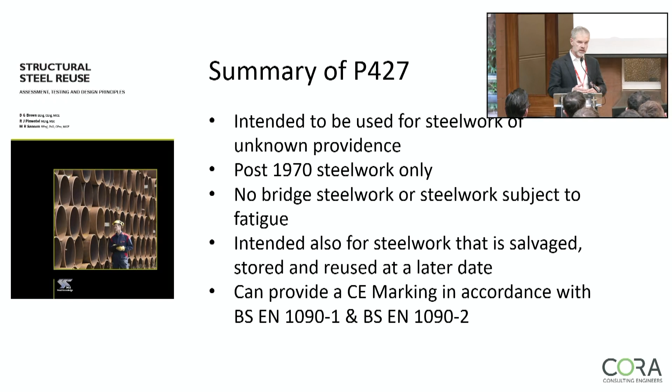There's a couple of things if you're dealing with compression members that you just look at in the clauses, which are a bit more conservative, but in general it doesn't make any difference. So with this in mind, we set about working on the project to see where we could reuse steel.

Revit is even a bit limited these days - it has one colour for demolition, would you believe? Unfortunately, we didn't have a colour for reuse yet, so we'll have to get onto Autodesk to get them to write that. But we used it to the best of our ability.

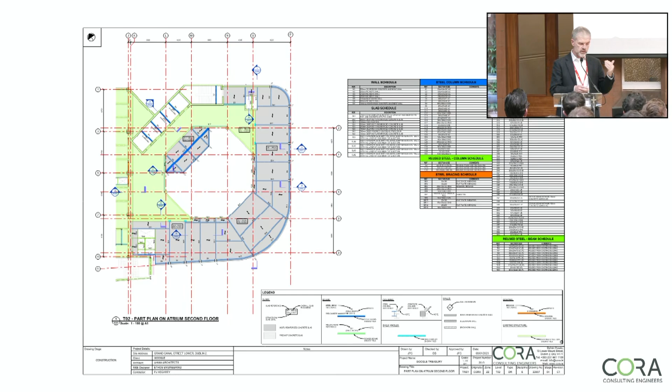Revit was really good because out of that we were able to create a whole set of drawings. What you can see here is a table, and the light green section on the right is the table we had for reuse of steel. This is the atrium section, just a blow-up of it, where you can see the sections - small but quite important - where we reused steelwork. So we've identified where that came from and where it's going.

This had a whole back engine behind it in terms of a live spreadsheet we developed, which wasn't Excel, it was a Google Sheet, of course, because the client was Google. Various people had access to it, from us to the design team, the fabricator, the contractor. So at any stage, anyone could input into this Google spreadsheet and define where the steel was, its condition, and what was happening with it.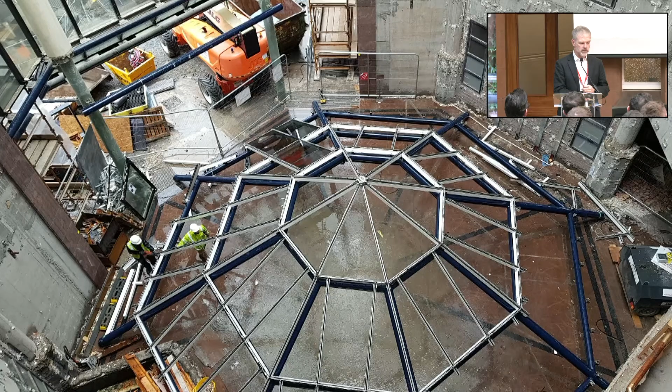As we started to dismantle the building, we had already identified where all this steel was going, so the contractor carefully took it down. Here we are taking down the transoms associated with the two central columns of the atrium.

We specifically told them not to cut back the joints on site, and even afterwards we didn't want them cut back to the bare metal, where it could actually damage the parent body of the material.

On the right hand side you can actually see some of the steel columns - the pair of steel columns that went full height in the atrium have just come down with their plasterboard lining coming off, just been inspected there.

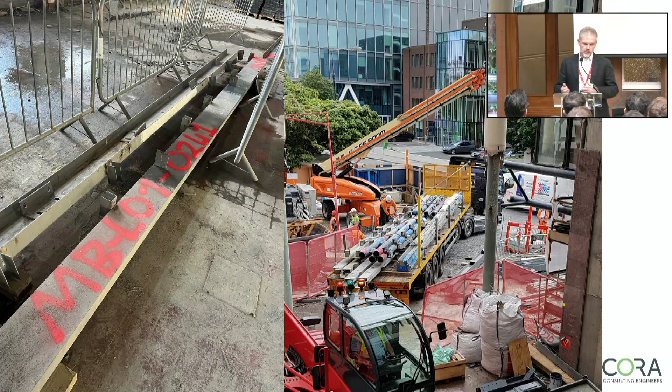We had a whole referencing system that all went back to the spreadsheet. As soon as the member was taken down, you had this referencing system - MB, level 1, and then the member size. That followed the steel member all the way along, so you could see where it went as it was taken down and where it was going to.

So you can see the steel is going straight on the back of the truck there and just going out the door down to the steel fabricator's yard.

So we spend a lot of time identifying where this would go, and that's what you see on this model here. It doesn't look like too much here, but what we did is we took steel that we knew, and with the contractor, we spoke and looked at his program of what he was doing. So what we tended to do was take steel from lower in the building and relocate it higher in the building so that he had time to bring it to fabrication and then bring it back.

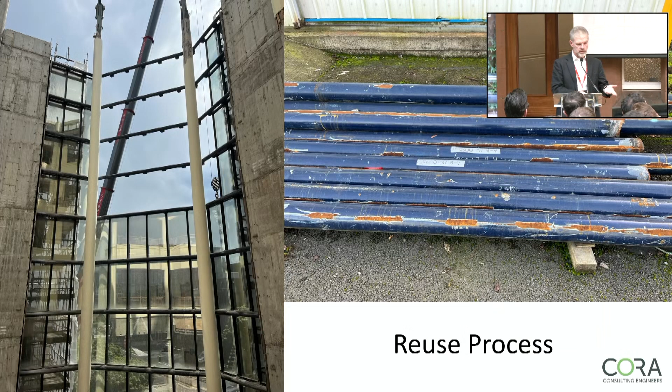So here you see it as they started to clean it up on the process. These are the transoms, and this is it down in the steel stock holders. On the left you can see some lovely 254 UCs that came from a mezzanine that was there before, which is just absolutely perfect for reuse. And you can see the circular hollow sections there just waiting in the fabricator's yard.

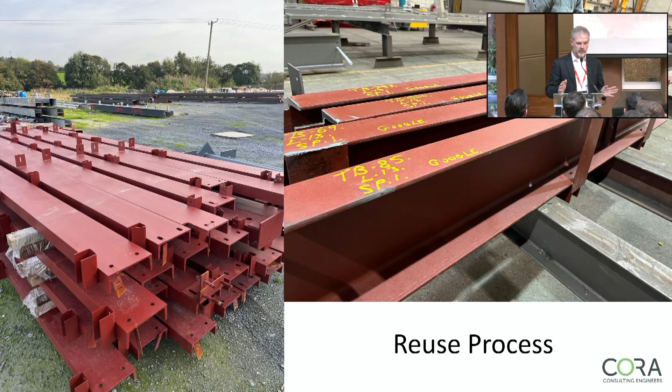And this is some of the steel work that's actually been put back. These are channel sections that were in the facade. These are the ones I showed you in green earlier on, the TB85s, saying they're going back to Google. In fact, I spoke to the fabricator last week just about his quantity of reuse in that, and he said, on those channels, he said, I have 100% reuse. I have none left. I've used them everywhere you asked me to put a trimmer in, even when you didn't have it on the drawing.

We did have one very large beam that was set back, which is this one on the left. That used to exist about 2 meters to the right. What they did there is they put the props up, brought it to the fabrication shop, and brought it back while the props were up. But that was unusual enough. That was our biggest beam, so we saved 3 tons of steel alone on that, with its associated embodied carbon. So it proved quite successful.

On the left-hand side here, you see in the lighter shade of grey, you can see the trimmers, again reused steel. And on the right-hand side, what you see here is the circular hollow sections. What effectively happened there is those circular hollow sections have been raised up 2 stories.

The wall thickness needed to be increased at the lower level, so what we did is we took down the original ones, sent them to the factory, they got new flange plates on them, and then they went back to site, but at a higher level, effectively in the exact same location they existed in before. So there was nothing wrong with it. Some parts of them were tested, passed the test, as if it was going to be new steelwork. We knew exactly where this had been for the last 40 years. There was no issue with it.

Now just to give you some figures on it, actually I want to mention that in terms of cost associated with this steelwork, the cost our client was charged for reuse of steelwork was actually lower than the cost of new steelwork. It was only about 10% lower. I was disappointed with that, but I think that was associated with them going into the unknown and pricing for risk. But in fact, the reuse of steelwork was cheaper than new steelwork.

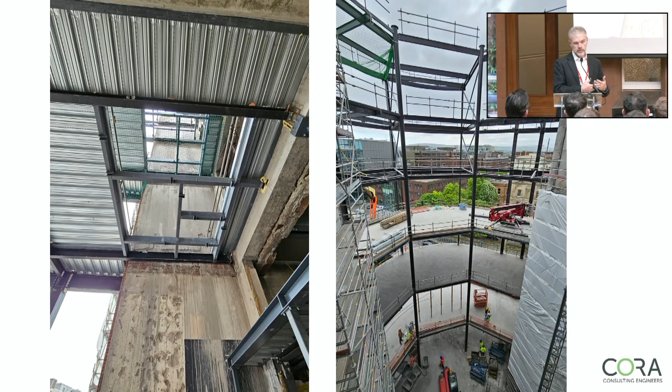So not only did we do the right thing by reusing steelwork and get low embodied carbon figures out of it, but it cost the client less money. It cost us a lot more time and effort, but we were doing the right thing.

So here's a table just comparing the different types of steelwork. On the left-hand side, you have blast furnace steelwork, virgin steel that would have come from Port Talbot, say, in Wales, which is closed now, and that's, say, 2,520 kilograms of CO2 equivalent per tonne. Electric arc furnace steel varies by the scrap content.

Take that example of the one David showed there as ArcelorMittal. If you just used a kind of average figure across the way, you would get variation between 842 and 1,200 kilograms of CO2 equivalent per tonne. And then the X-Carb figure, which is much lower, where they have upped the scrap content even further according to the EPD, and they're also using renewable energy.

Their EPD gives figures of 333 kilograms of embodied carbon per tonne, and we're using that. Also on cost, X-Carb steel is more expensive, but only about 30 euros a tonne more, according to what the fabricators are telling me.

So it's not a significant difference in cost, but it is pushing the manufacturers that way. It's the only one available now, but other low embodied carbon steels are coming onto the market from other suppliers soon. It's something we should all be specifying, because when specifiers ask for these things, manufacturers sit up, listen, and start investing to match what the demand is saying.

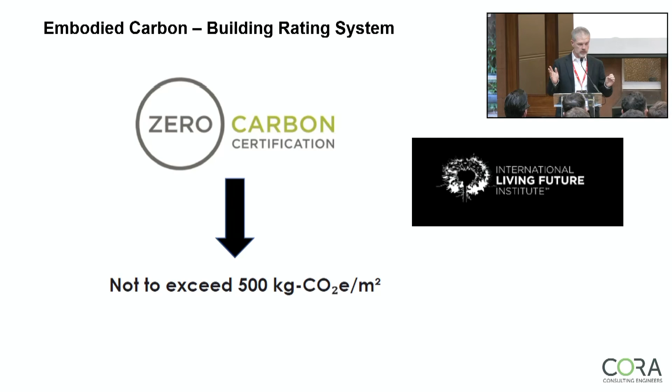But we suggested going with this International Living Future Institute carbon target, which was purely about Module A embodied carbon, not to exceed 500 kilograms of CO2 equivalent per metre squared, and Google agreed to go with that. So we had a pure embodied carbon target, nothing to do with LEED.

This - I should have spoken to Craig beforehand about his graphics, and I like a good spreadsheet, but this is what I came up with, so maybe I'll change this for the next conference. These are the basic raw data figures - I'm an engineer, come on, this is what we do.

For stages A1 to A5, the target from the ILFI was 500, but our actual as of last week was 207 kilograms of CO2 equivalent per metre squared. For stages A to C, the benchmark from LEED is 843. Craig mentioned some GLA benchmarks which are about 590. We're actually at 461 for that, so we're below that as well.

We have substantial reuse of foundations, with a few extra foundations - just some mini piles here and there where we had pile caps we needed to strengthen, but they're all mini piles. To put that in context, our RIBA 2030 target is 750, our IBA target is also 750. Now, LETI has a range, and probably 750 is about a D rating associated with LETI.

So we're really happy with the figures we've got, 207. One of the things David started with - when you're doing a low embodied carbon design for a building, it's not about trying to achieve savings in just one location, it's about chipping away slowly at lots of different places along the way, which is how we achieved that figure. So the steel made a substantial difference.

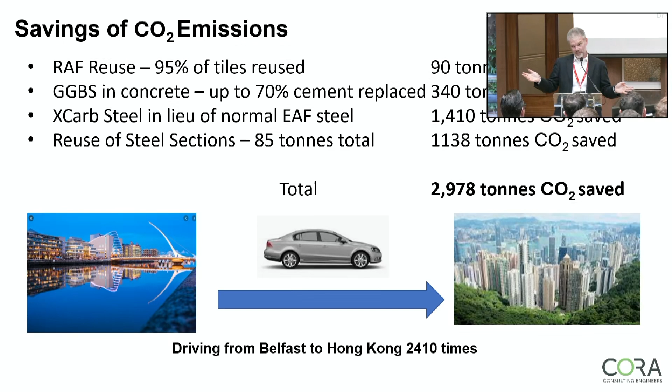We haven't quite finished it, we're still doing a few bits and pieces with it. That's why I was asking the fabricator last week, how much have you left? And he's literally saying, I've hardly anything left here. I've just seen, we brought everything to do with the PFCs that were in the facades down, and he said he's just reused them absolutely everywhere. He's delighted, it's free issue steel for him. He's making a fortune out of this project. So I'm fine with that, we're trying to do the right thing.

So just a final couple of slides associated with some of the things we learned on our journey along the way, which might interest you. Down south, we have our technical guidance documents, approved document D we call it, and the equivalent up here, the technical booklet B. I just want to do some comparisons between the two.

On the left-hand side, the one in the Republic talks about the use of proper materials, and it basically says that materials should have a CE marking, or it goes on to talk about an appropriate harmonised standard, or ETA from Europe, or an Irish Agrément certificate, and we're allowed to use any of those. The Northern Ireland one talks about CE marking as well under the construction product regulations. And when you go into more detail on the construction product regulations, it actually says very simply, in order to comply with the construction product regulations in Europe, your product must have a CE mark to allow its general sale.

Now, the steelwork we reused on the Treasury building, we started on our journey wanting to have CE marking for a number of reasons. One was we absolutely wanted to be completely clean and have a complete audit history of the steelwork in case building control ever asked a question about it, or in case anyone ever asked a question on it. So that's why we went the route of CE marking. But it also turned out we never needed CE marking in the first place to comply with construction product regulations, because we weren't selling anything, we weren't putting anything on the open market.

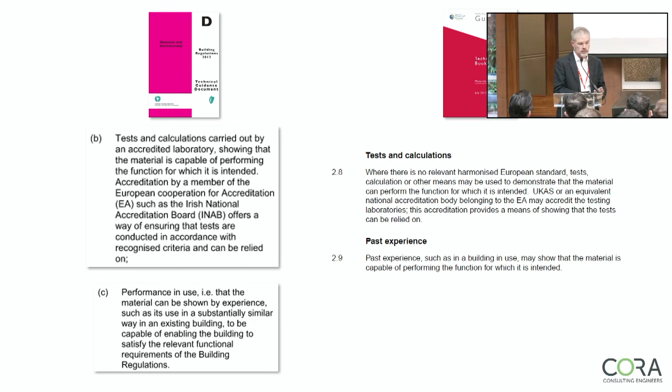We don't need to throw it out just because it's old. So I just want to finish with a couple of slides of the project, where we were.

This is the vertical extension going on. In the background, you can see the two stories that are going up on the building there. You can see the metal deck, and the way the new floors are going on with the composite metal deck. This is the first facade panel going on, a unitized facade system.

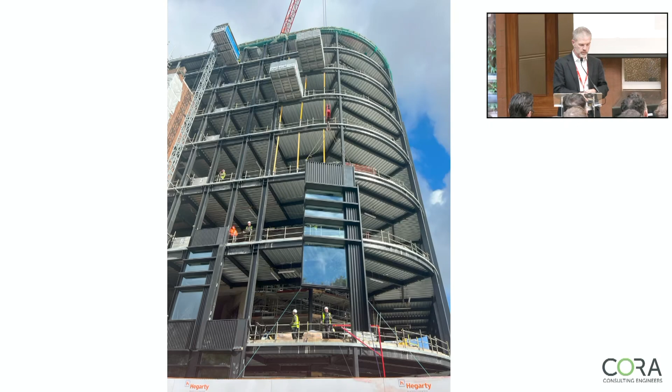This is the southern elevation, so there was a lot of light getting in, so you can see the shelves there to try and reduce thermal gain and keep the running costs down. I haven't mentioned much about operational carbon and use, but it is very efficient, and there's a lot of rainwater harvesting happening here for reuse and flushing of toilets, but that's not really my area, except we had to create the tanks to collect it all.

This is a view from up above. It looks remarkably similar to the drawings, thank God. So this is the atrium going up. This is the southern facade. It's on a very tight site. And this is the southern facade going up.

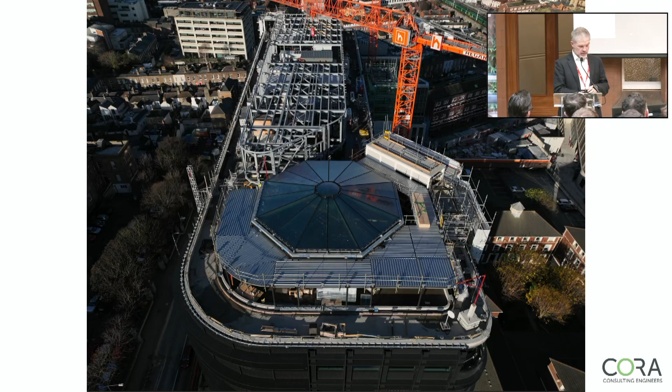And this is the roof light that went on. The oculus went on about three weeks ago. So the atrium is weathered now, technically. As of the meeting I had yesterday, they announced it officially. And this was a photo I took on Friday of where the building is now.

And I'll finish with that. Thank you.

So I'd like to invite our speakers, Brenda, Gavin, Craig, John and Sharon, to join me at the front here for our panel discussion. And while they make their way up, I'll introduce Sharon Poots, who will be joining us today for the panel.

Sharon is an architect and senior project manager within the Northern Ireland Housing Executive. She specialises in domestic, educational, commercial and conservation works. As a senior project manager, Sharon has worked directly on a variety of both new build and retrofit pilot projects to investigate innovative methods of construction along with sustainable active systems.

Her portfolio of projects includes the first new build scheme for NIHE in over 24 years, which investigates modern methods of construction along with ultra-low energy building techniques. It aims to inform policy to future-proof new housing provision and contribute to the government's commitment to reducing carbon emissions. That project was completed last year and has attained Passive House Classic certification.